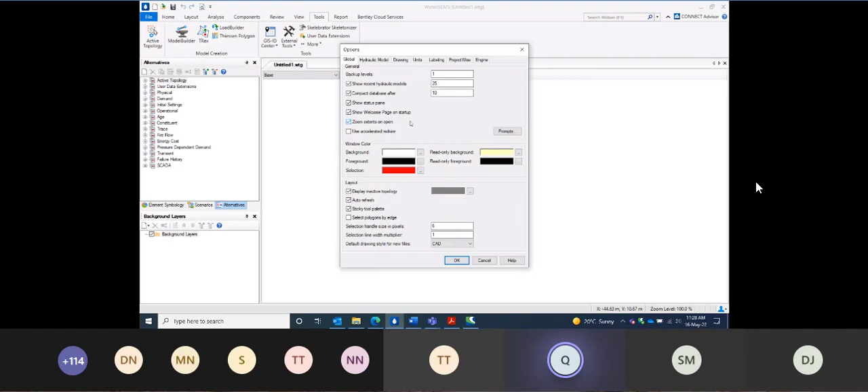Okay, continue Dean, yeah, units. Default unit system for new hydraulic model, SI. Reset defaults, SI. And that's it, okay.

That's okay, excellent. So back to home. And what we're going to do now is import some files so we can build our model, then we're going to modify the model, run it, check the results, and rerun it with some changes.

Home, and then all the way out here, Model Builder. In Model Builder, go ahead and select New.

Okay, so select database type: Esri shapefiles.

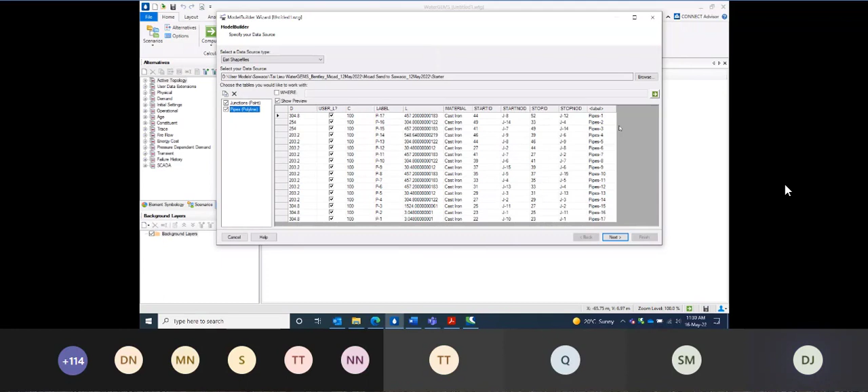Okay, next. Make sure you change the coordinate system to meters. And next. Oh sorry, just go back.

And just make sure this one is checked: create nodes if none found at endpoint. Yeah, and next.

This screen we don't need to worry about because this is regarding model building for a second time. So next. Yeah, this is all correct, current scenario and label is correct. So next.

Okay, so now we need to do table type: junction is correct, and then key field we want label.

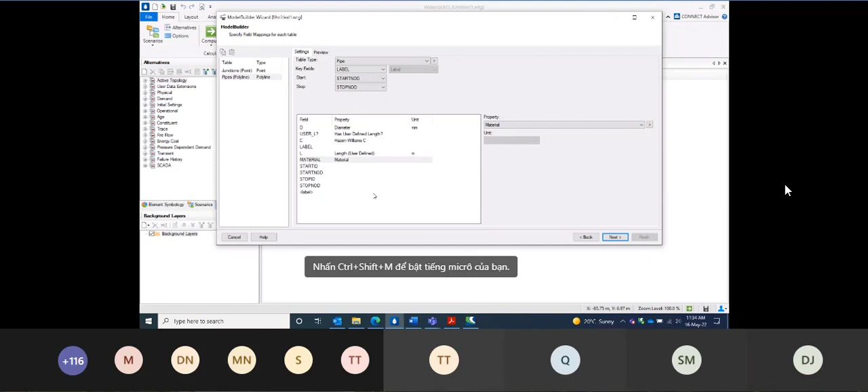That's all done? Yeah, yeah, please wait a minute.

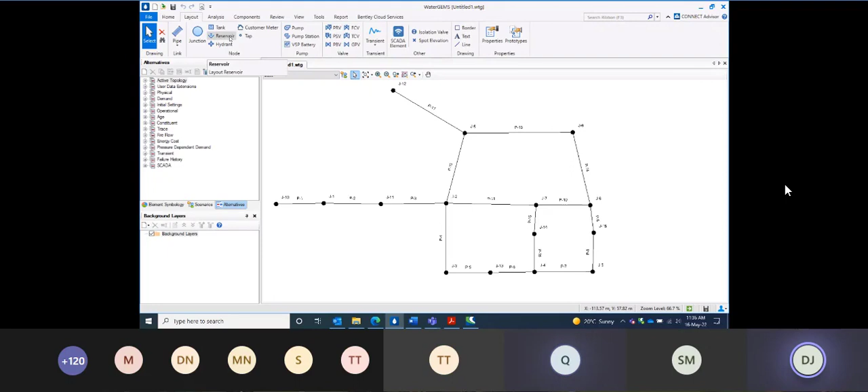So up to Layout and then select Reservoir. And then junction 10 out on the left, click right on top of it. It says, would you like to morph junction 10 into reservoir? Yes.

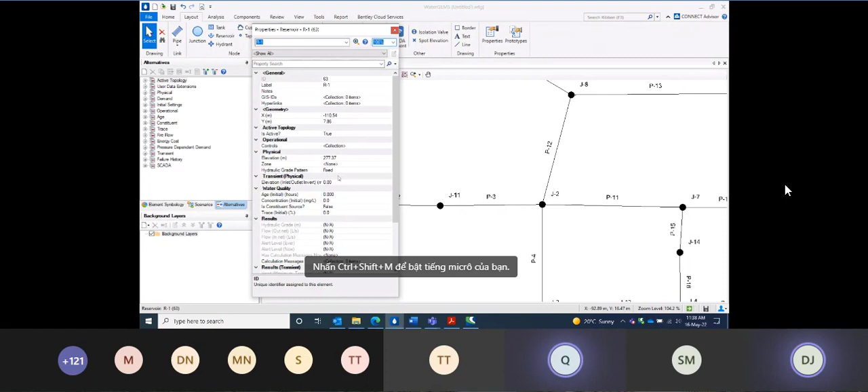Yeah, Dean, we can continue. So either right click and done, or select the select toolbar, and then you can double click to open up the properties of the reservoir. And we need to change the elevation. So the elevation here needs to be changed to 289.56.

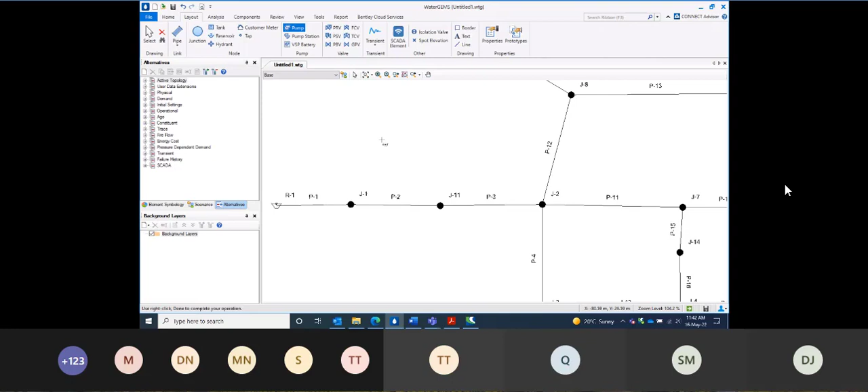Now we need to morph the other elements. So the next one, on the Layout tab again, and pump. Pump is junction 11. So click on top of junction 11. Would you like to morph junction 11 into a pump? Yes.

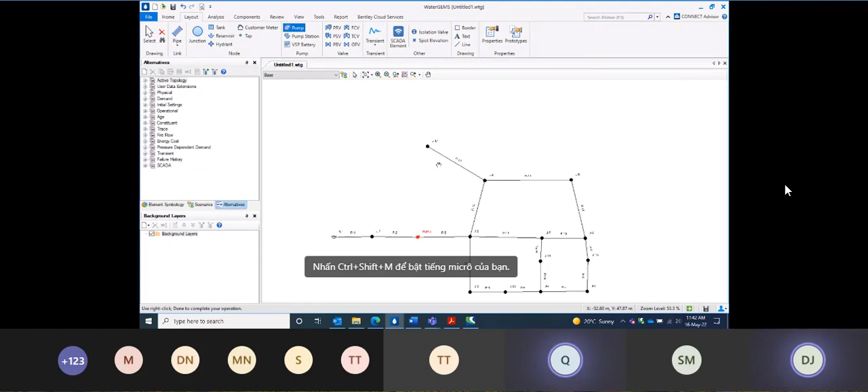Okay, so if we zoom out and go back up, this time tank. The tank is junction 12. So go ahead and click on junction 12. Would you like to morph? Yes.

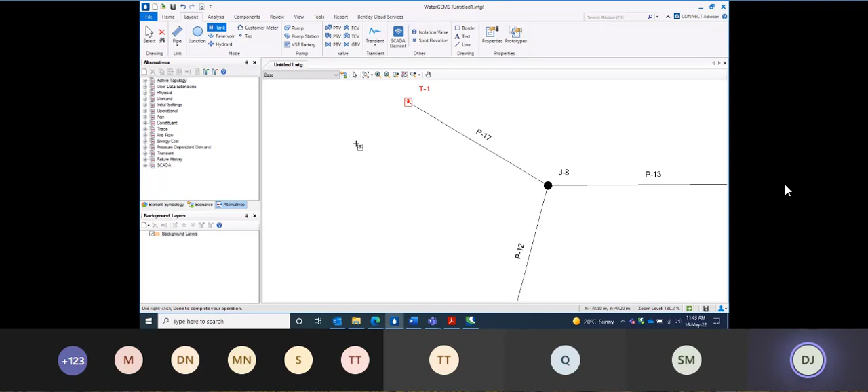Okay, so go back to the select toolbar. And then we need to use the control key, so hold down control and select 13, 14, 15. And then go to Tools, More, Batch Morph. So open up batch morph and selection, and the element type that we want to morph to is PRV. And then OK.

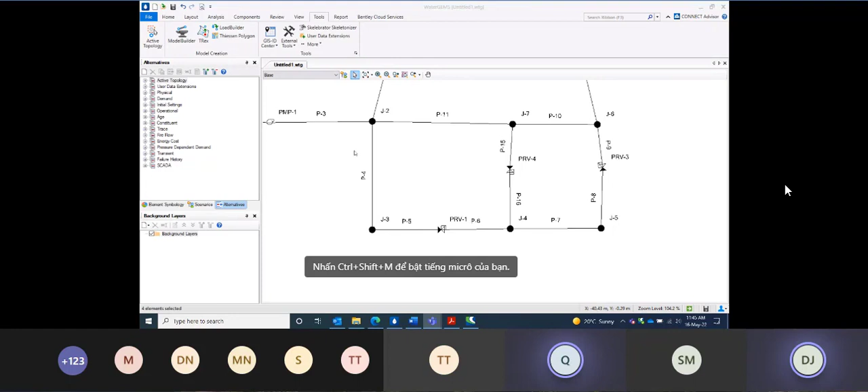So now we need to make sure that the PRVs are facing the correct way. So you come over to PRV 3 on the right and open up the properties. See the downstream pipe here is pipe 9, which is facing the wrong way. So what we need to do is reverse it. Go ahead and click reverse, and it will of course turn it around so that it's now facing pipe 8.

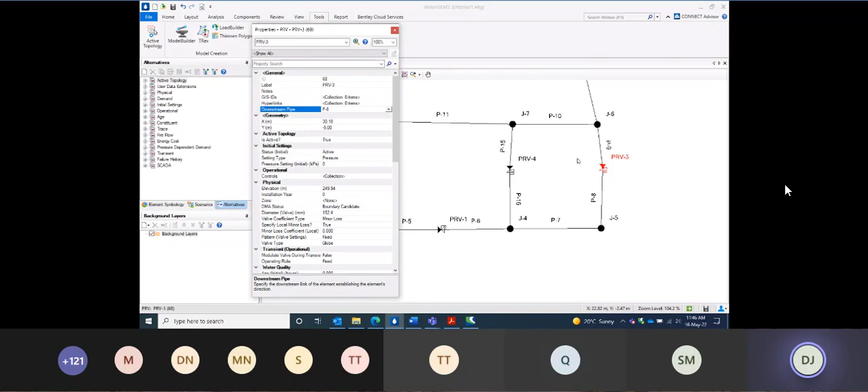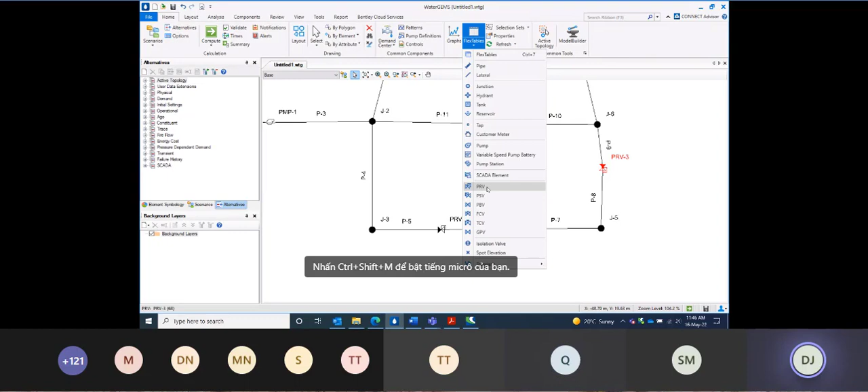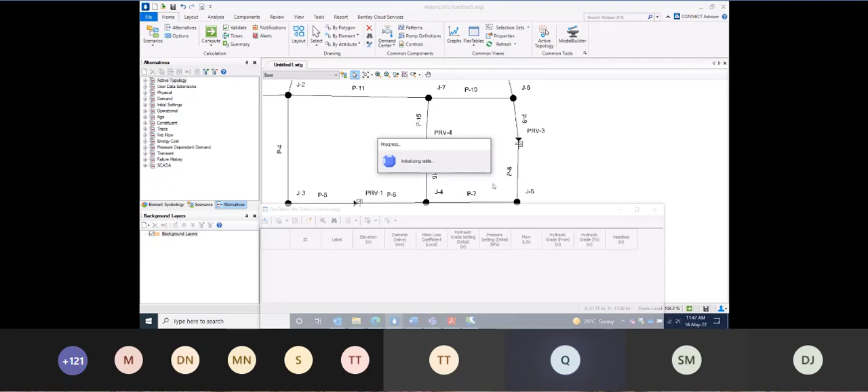Okay, so now we need to use the flex table to put in some values for the PRV. So if you close down the properties and then go back to the Home tab, and then Flex Tables, PRV. Hang on a sec, just change mine back to a tank here.

So now we need to put in the hydraulic grade setting, and also the diameter of the valve. So the diameter of the valve for all of them is 100. And then the hydraulic grade setting as well.

We need to check the elevations. So, 249.9, 253, 253.

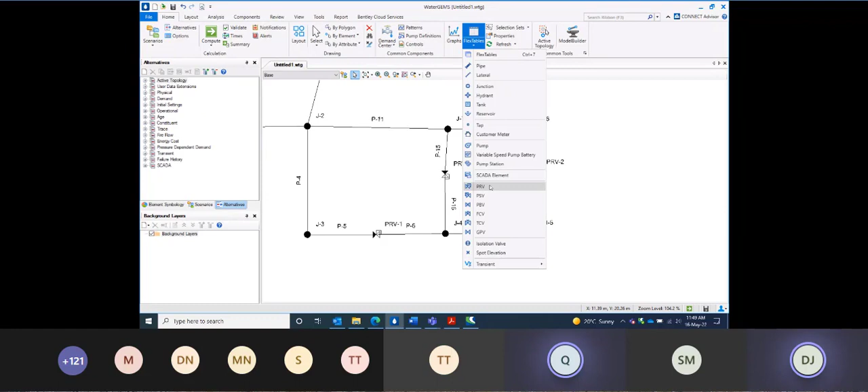Sorry, mine are the wrong way around. I'll just... no, yeah, it's fine. Okay, so now we need to go and put in a pump definition.

So next to Demand Center, we find pump definitions. Yeah. And then create a new one. And then we need to enter some values.

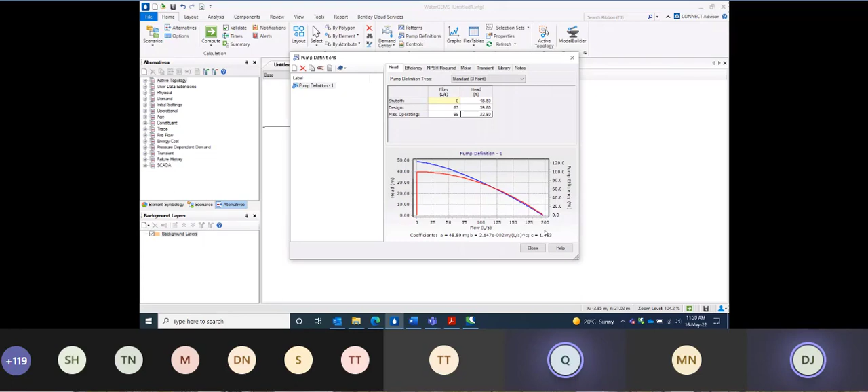Yeah. Okay. So if that's done, you can click close. And then go to the pump. Open the properties. Yes. And set the pump definition to pump definition 1.

Yeah. We also... but once that's done, that's all. You can close down.

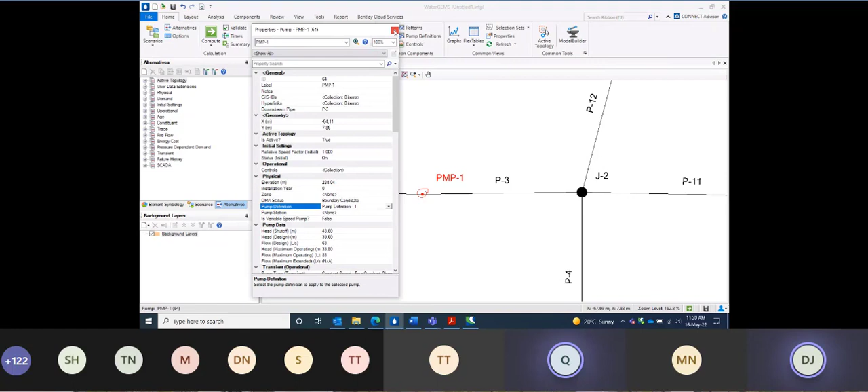And then go to the tank. Yes. So at the tank, we need to enter the elevations. So you need to copy down these.

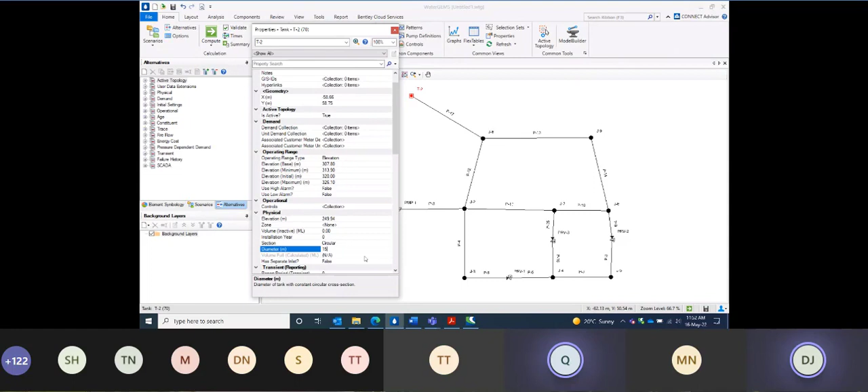Yes. Okay, yeah, okay, yeah. Once you've entered all of those, you can close that down and then click compute.

Yes. So now we can look at some results. So the first thing that we need to notice is whether or not the tank is filling or emptying. Yeah. And then we also need to notice down here whether PRV3 and PRV1 are actually operating.

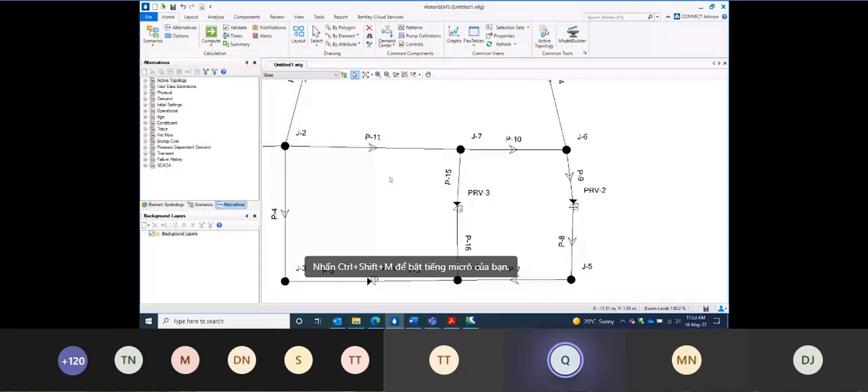Yes. Yeah. Okay, so we're ready to move on to the next portion, are we? Of this workshop?

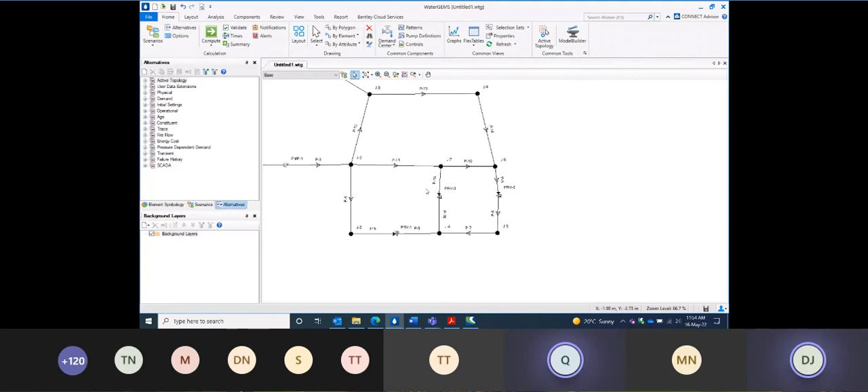Yeah. Okay. Yes, please. Okay, so now what we're going to do is add an additional demand to see what happens to the system. As you can see, the flow is going into the tank from the arrow, which means the tank is filling. So what we want to do is put an extra demand on and then see if our tank is still filling or if it's emptying.

Yeah. So on the alternatives tab here, which is already docked on the left, you want to go to demand, and then expand demand from base demand. Yeah. And then right click new child. Yeah. So the child, I'm going to say average plus industry.

Yeah. And then double click average plus industry. Yeah. And then go and find junction 5 and highlight junction 5. Yeah. Change the demand base from 3.2 to 95. Yeah. Close that down.

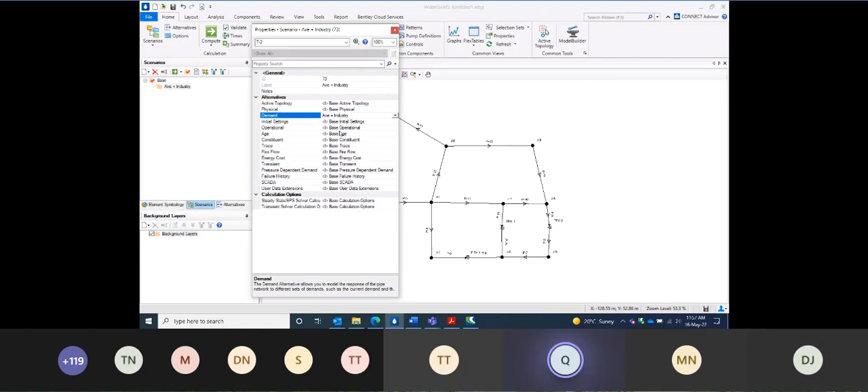Yeah. Okay, so double click on average plus industry. And then change the demand from base demand to average plus industry. Yeah. Close that and then right click make current. And compute. Yeah.

And should find that the tank is now emptying.

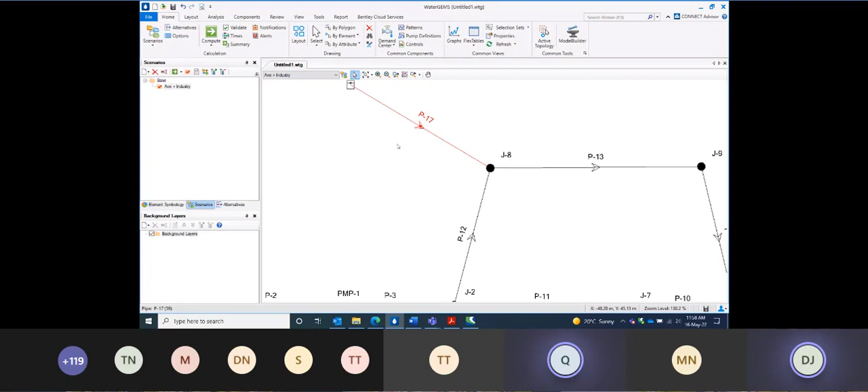And so that's it. That's the finish of the first workshop. Yeah.

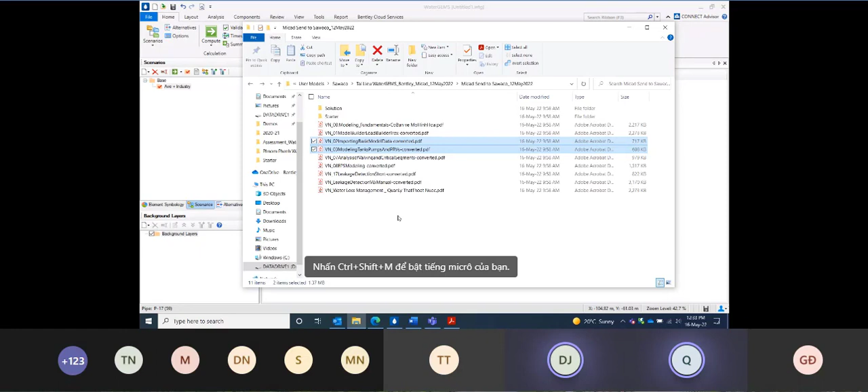And then the next one here, our fundamentals, we're actually going to draw that out ourselves. So rather than import it through Model Builder, which is easier, we're going to draw it on our own. It's okay, yeah.

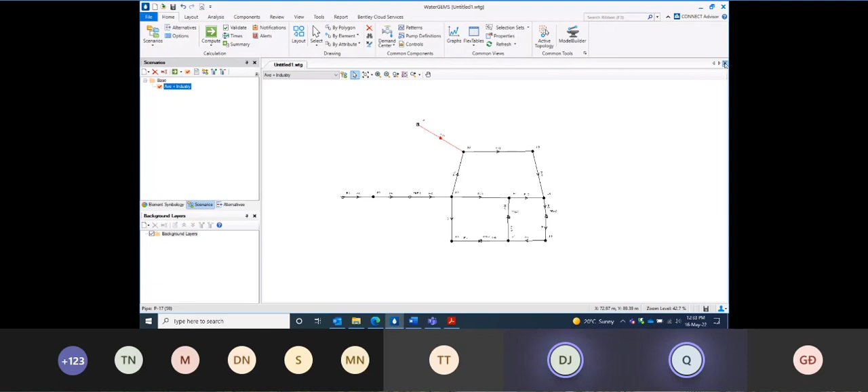Okay, so if you go back to WaterGEMS here, all of the solution files are available, so you don't need to keep this. What you can do is just close it down. And do you want to save it? Either yes or no, but for me, no. And then create a new blank hydraulic model.

It's okay. So if you go to the PDF, because this is our second one as far as the workshops, we can skip some steps, so we don't need to... just give me a second here. Yeah.

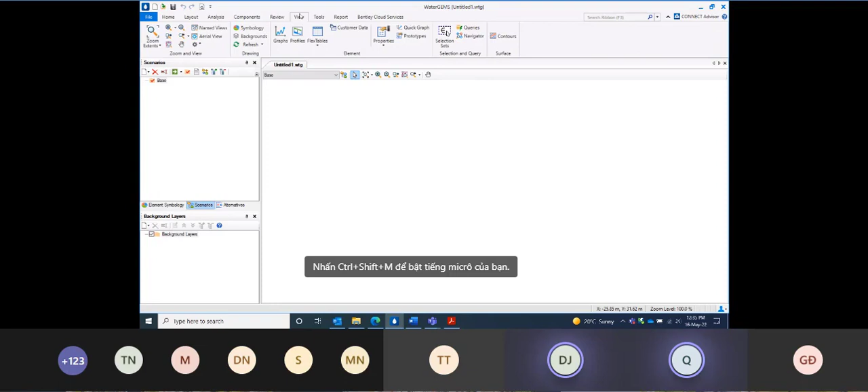So to do that, go to View, Prototypes. And then with pipe highlighted here, click New. Double click pipe prototype 1. And change the diameter to 150.

And the material here, if you click into material, see ductile iron, then you'll see the ellipsis on the right hand side. Click the ellipsis, and that will take you to the engineering library. Now, the library comes with the product, but you can also add your own library if you want to, so if you have a preferred supplier, say Vinidex or Steel Pipes or someone like that, then you can add the library into the engineering libraries. Otherwise, we have a built-in library which you can access using the plus, and there you can see the material library.

The one that we want is PVC. Once you've selected PVC, click select, and you'll see that it changed the material and the Hazen-Williams C factor. So it changed both of those properties at the same time. Once you've selected those as your prototype, you can close it down.

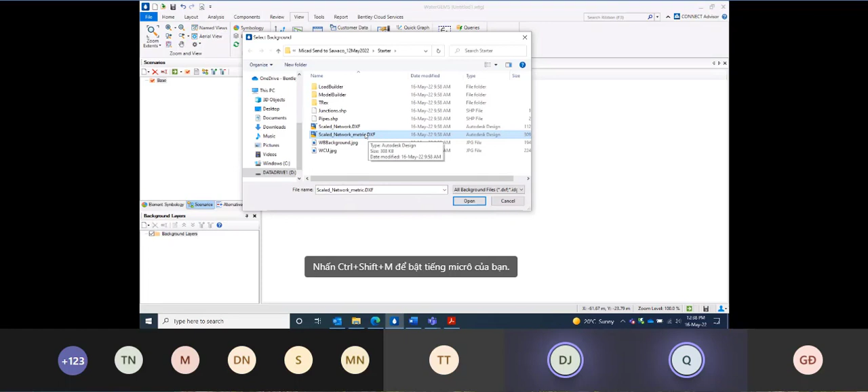Alright, once you've done that, we need to add a background because, as I mentioned, we're going to draw this by hand, so of course we need a background to draw onto. Down to the bottom left here, in background layers, and new file. The one that we want is in the starter folder and scaled network metric. Click OK, and then you should find a background.

Yeah, it's okay. Alright, so now we need to lay out the network. Before we do that, I'm going to give you a chance to practice. So if you come up firstly to the tools tab, more options.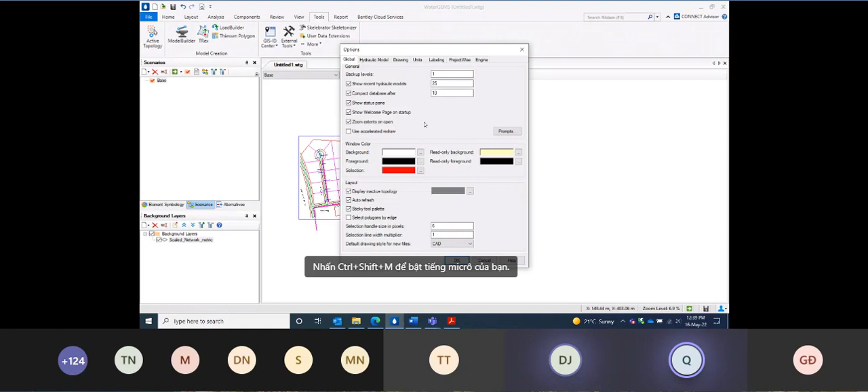Okay, so if you go to the drawing tab, you need to change the symbol size multiplier to 5, the text height multiplier to 10 - that's just because of the scale of the background we're using. So we'll change these multipliers, do some practicing, then delete those and draw it out properly. Symbol size multiplier 5, text height multiplier 10, then OK.

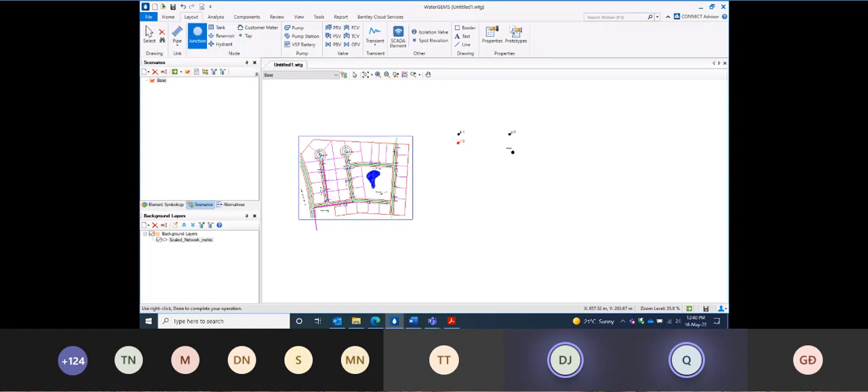Yeah, that's okay. Okay, so go up to the layout tab, and you see that we've got all of the elements listed here. If you select any of the elements to the right of pipe, for example junction, you'll see what happens if I place junctions - there's no pipe, it's just placing an individual junction with no pipe. So to place a pipe, you always need to use the pipe tool here. If you click on that, you'll see it will do the same thing, placing junctions, but this time it has a pipe connecting from junction to junction.

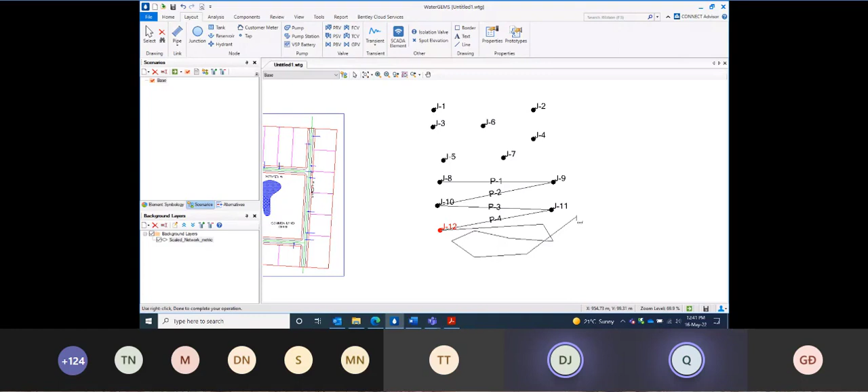So if you right click, you can change the type of element that you're placing, and then right click and you can place various things - so pump, and then change it back to junction, and right click and left click.

If you click done, it will disconnect from the element, and then you can rejoin things with the pipe tool. So you can connect them and then right click done, disconnect, connect in, reconnect, right click done. I'll give you a few minutes to practice the right click and left click buttons.

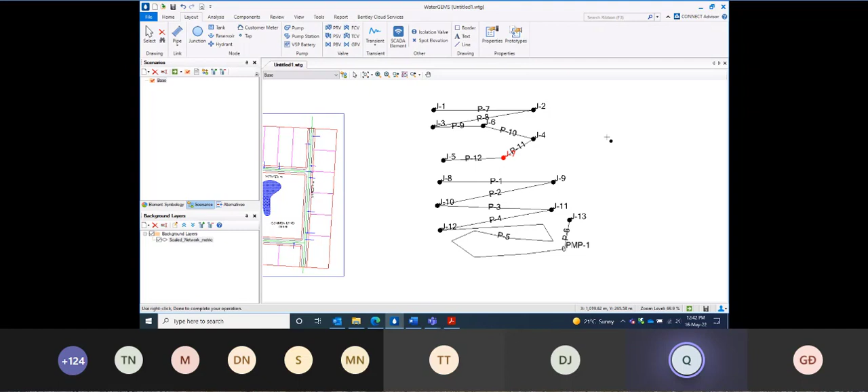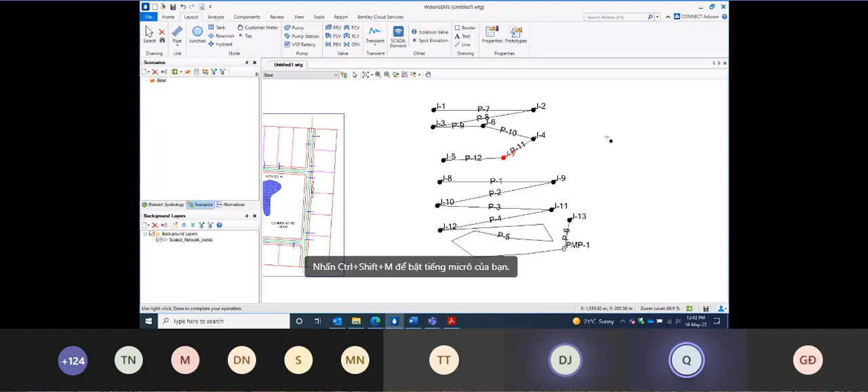Yeah, we can continue. Okay, so you go done, it goes back to select, and what I'm going to do is just draw a box around the whole thing and delete.

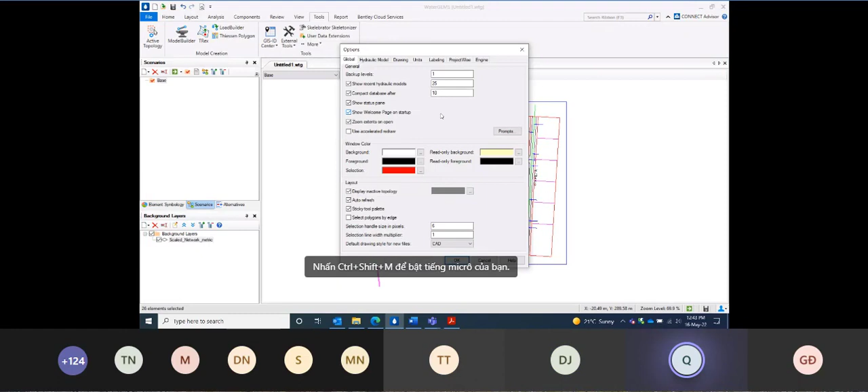If you were like me and you practiced, then we need to reset our drawing labeling system. So go to tools, more, options, labeling, and then reset. This part isn't in the PDF, it's just a bit extra because we had a practice. If you didn't practice, then you don't need to do that, but you just need to reset them so that they all go back to 1.

That's okay. Okay. So, okay, and then back to the layout tab and the pipe tool.

Now, what we want to do is come up to the top right here and right click anywhere, so right click, change to tank. And then up here in the top area, go ahead and place, using the left click, a tank. That's okay, yeah.

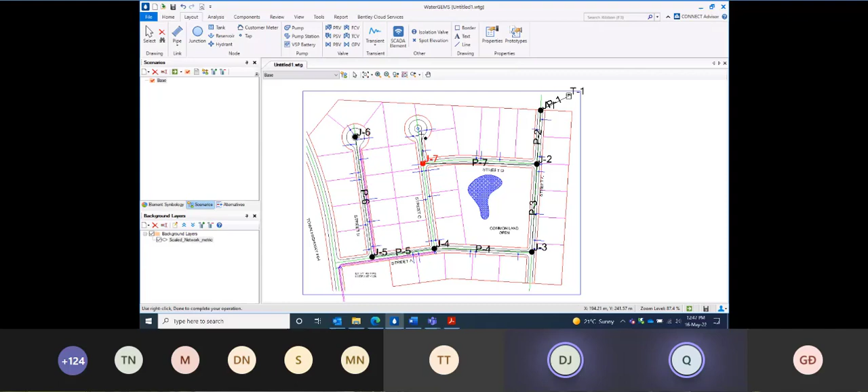Once you've placed junction 6, you need to right click, say done. Then we need to reconnect into junction 2. So connect to junction 2, over to the end of the road, that's junction 7, and then up to junction 8. Once you've placed junction 8, right click, done.

Now we need to connect junction 7 into junction 4. Click on top of 7 and then on top of 4, right click, done.

Require a few minutes for SAWACO to follow. Yeah, sure, yeah, one minute. Yeah.

Yeah, then you can continue. Okay, so the last bit is just from junction 5 over to the end of that road for junction 9. That's it, so right click, done, and then go back to your select or done. Yeah, okay.

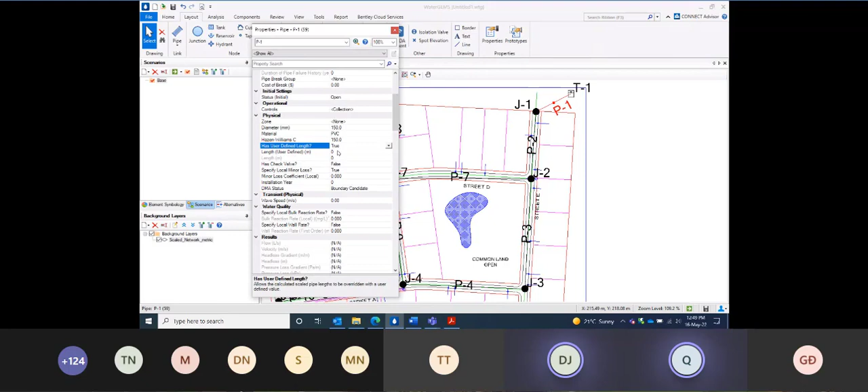What we want to do is scroll down into the physical section, where it says has user defined length is false. You want to make that true, so if you double click on it, it will swap to true, or you can use the drop down and select true. Either way, you need to enter in 137. Yeah, okay.

Alright, once you've done the pipe, you can either close down the properties and double click on the tank, or with the properties open, you can just click on the tank.

So now we need to enter the elevations of the tank: 198.1, 198.1, 202.7, 207.3.

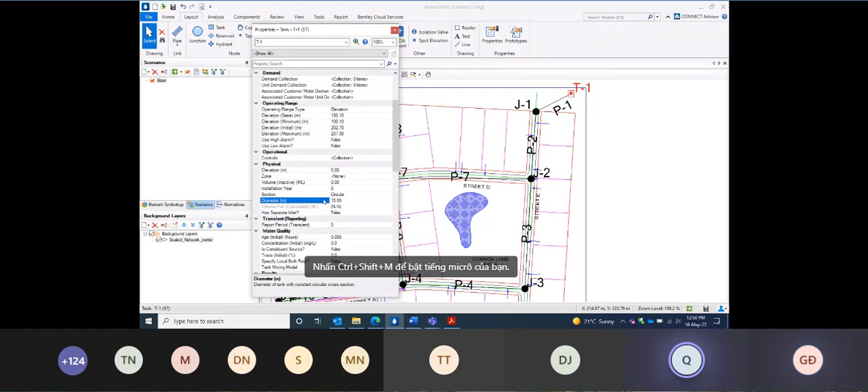Also, down further in the physical area, we need to enter the diameter, which is 15. Yeah, yes, okay. Okay, so if you close that down, and then go back to the Home tab.

Under the Flex tables, you'll find the Junction table, and the junctions should be listed from 1 to 9 in order. What you need to do is enter the elevations and just copy them down.

Just give you a minute to copy those down. Yeah, one minute. Sure.

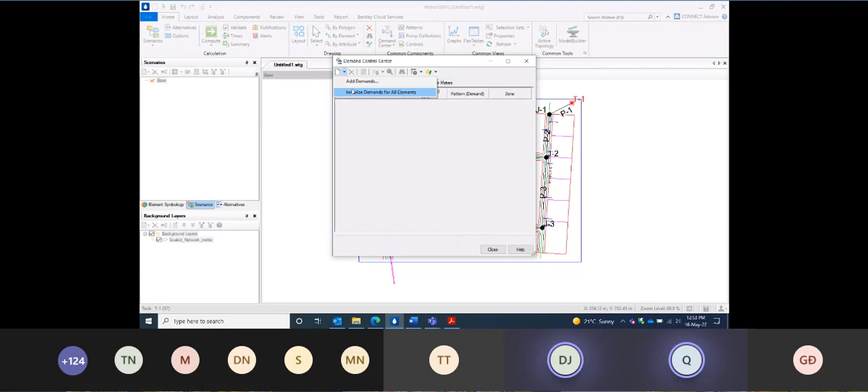So what we need to do is fill in the 9 junctions. However, they're all the same, so rather than typing them in, there's a quicker and better way, and that's the global edit. The global edit function is extremely valuable and will save a lot of time.

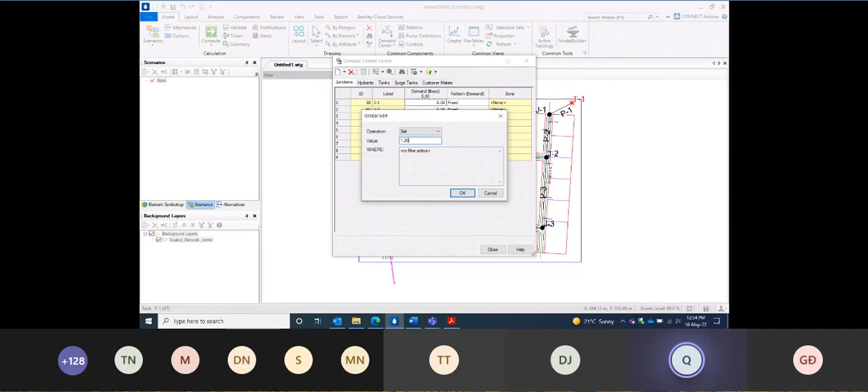So if you go up to the top demand base and right click, you'll find global edit. Set value 1.26. Okay, so they should all be 1.26 now. And close.

Once you've done that, you can go ahead and click compute.

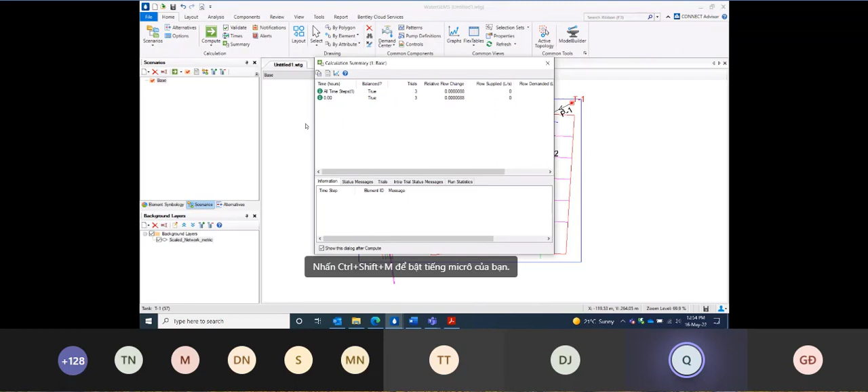Okay, so now that we've computed it, we have results available, and what we're looking for here is some particular results, and that's junction 6. So we're interested in junction 6 and the pipe leading into junction 6, which is pipe 6.

So the first thing I'm going to do is just click on junction 6 to bring up the properties, then scroll down, and here you can see the pressure. You see that the pressure is 25 meters head, so 25.21. So there is a lot of residual pressure here at junction 6.

And then I'm going to click on pipe 6 and do the same thing, scroll down to the results, and then you see the velocity here, 0.07.

Okay, so all we need to do is just remember those values. So 25 meters and 0.07 meters per second, and we can move on to the second part of this, which is when we put an extra demand on, and of course then we'll check the results and see what happens.

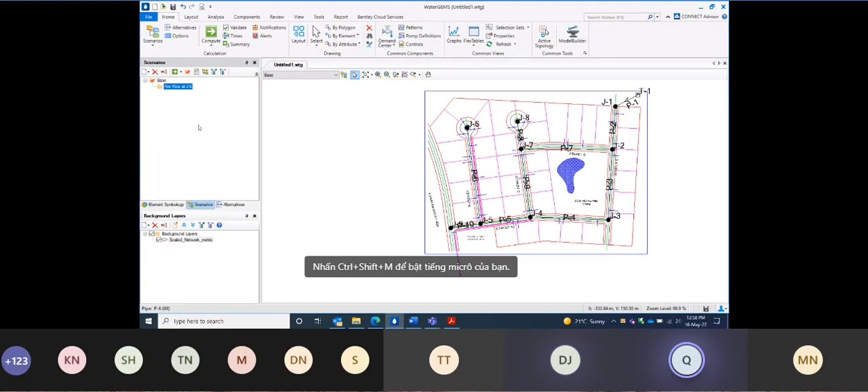Double click, open up the properties and change the demand from base demand to fire flow at J6. Now the most important thing is that you need to use the make current button here, or you can right click and say make current, or you can use the drop down here to make it current. Once you've done that, compute.

Yeah, okay, so you see that we've got an error message down the bottom. The error message says that basically our system can't meet the pressure, or the flow that we're trying to get out of it.

So I'm going to do the same thing as last time. I'm going to go to junction 6 and check the results. And you'll find that now, instead of 25 meters of pressure, we have minus 19 meters of pressure. So obviously, if it's minus 19, minus 18.6, that means we're not delivering the flow, or we're unable to deliver the flow.

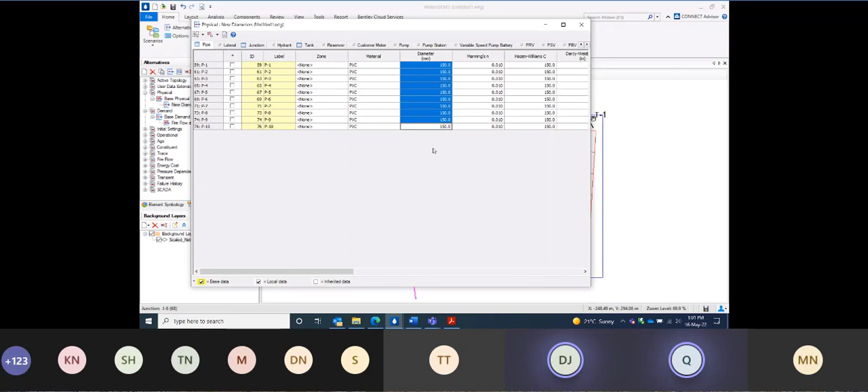So double click on new diameters. And you'll see here that the pipes are listed, and then we've got the diameter column here. What we're going to do is we're going to change some of these diameters.

So firstly, pipe 1, change from 150 to 250. Same with pipe 2. And then pipe 3 to 6 are all 200. And then the rest we can leave the same, 150.

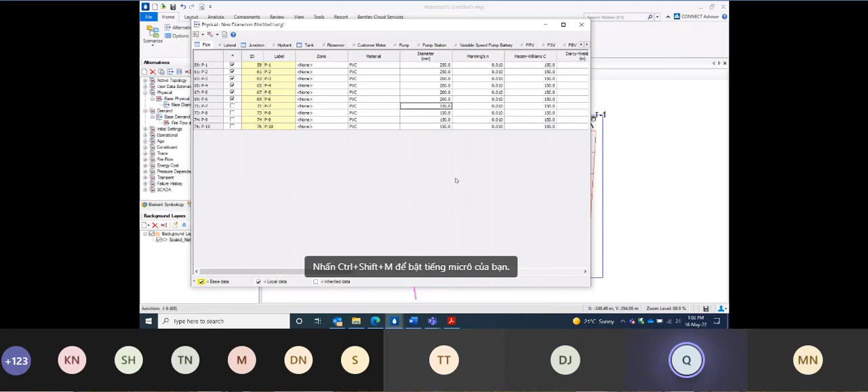Okay, close that down. And then we of course need another scenario to put that in. So back to these scenarios, and fire flow at J6, right click, new child. This is called fire flow with new diameters.

Open up the properties and you'll find that fire flow at J6 is already set for the demand, and that's because we inherited it from its parent. So because we took a child, we inherited that one. Of course we need to change the physical alternative though.

So go ahead and change physical to new diameters. Of course, don't forget to make it current, and then compute.

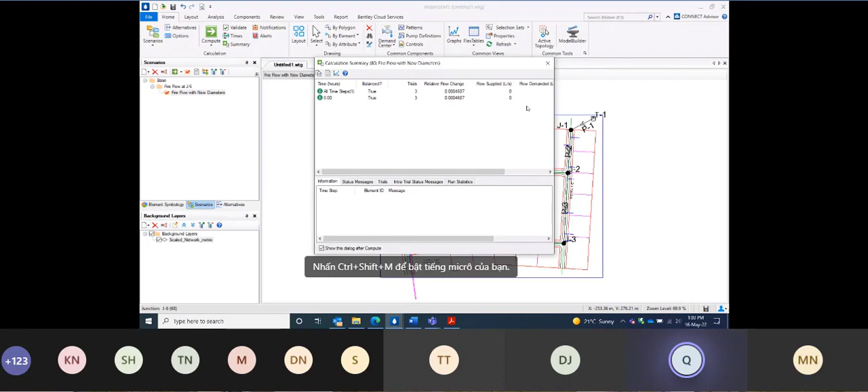Okay, so once you've computed it, you can go back to J6 and check the pressure. You'll see that now, even with a very large fire flow, with the increased diameters, we're able to get 16 meters of pressure, whilst also meeting the demand, which is of course the 63 liters a second.

You can check the velocity too if you want. Yeah, the velocity is over 2 meters per second.

Okay, any questions regarding that workshop? Because that's the end of it.

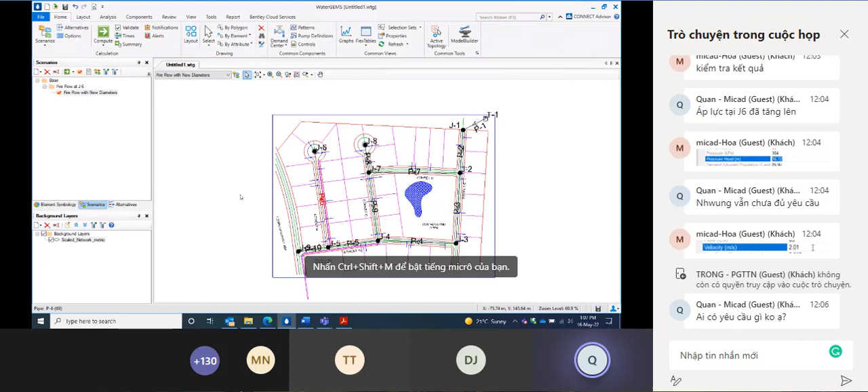For now, have no question. Yeah, we can continue. Okay.

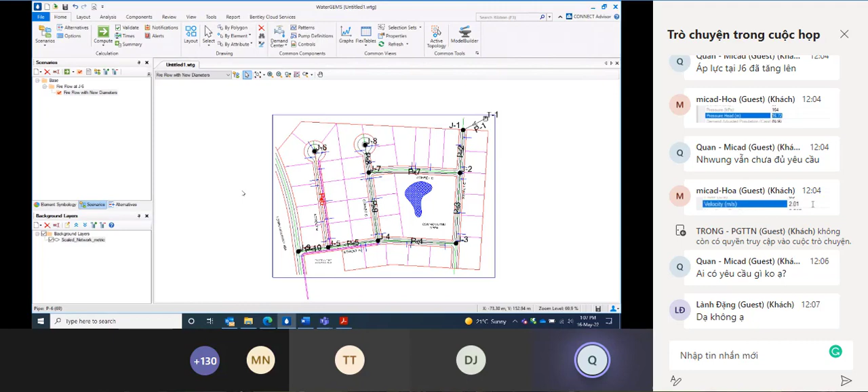So obviously that's another workshop finished for today. So not that one. We've now done 3 workshops, and for some reason there seems to be 2 of the same listed here, and this one's a PowerPoint presentation, not a workshop. So I think probably for today we should do one more and then finish, and then complete the rest tomorrow.

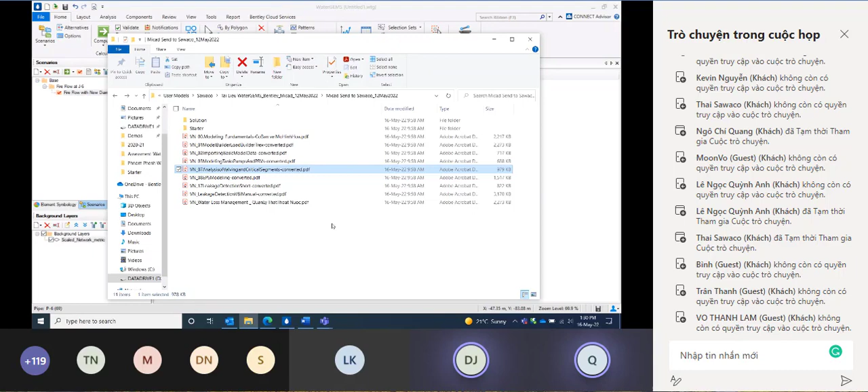So analysis of valving and critical segments, like I said, is the next one, and basically what we're going to do here is investigate a network with isolation valves in it to see whether or not the isolation valves have been placed in the correct spot, or if we need more, or if we need more interconnecting pipes.

So to open that up and get it started, if you close down the last one, and then this time go File, Open, and in the Starter folder you'll find Criticality. So go ahead and open up Criticality.

Okay, so first thing is you can see we've got the original valves here, so if you just zoom in and around, you'll find these isolation valves here, placed at various spots around the network. If you check the layout tab, you'll see there's a valve section here, and the valves here, you can see PRV and so on, flow control, throttle control, general purpose. So each of these valves breaks the pipe.

However, the isolation valve is over here on its own, and that's because if you check the isolation valve, you'll see that it has a reference pipe. But if you click on the pipe, you'll see that it's one entire pipe. So the isolation valve has not broken the pipe. Each one of these pipes is just one pipe with a valve on it, but it has not broken the pipe into 2. So that's the difference between this valve and all of these other 6 valves.

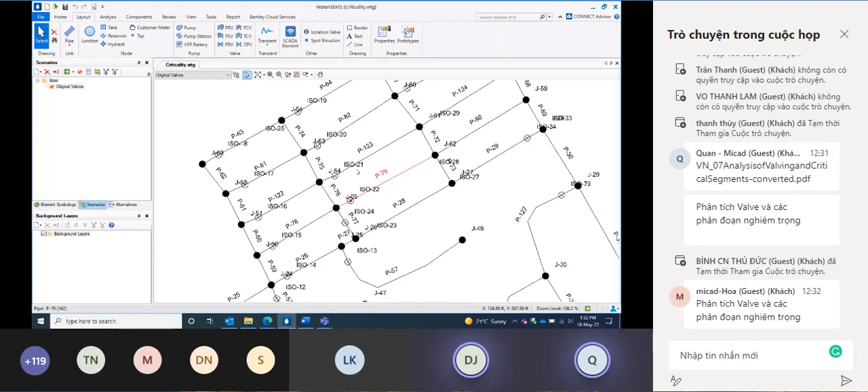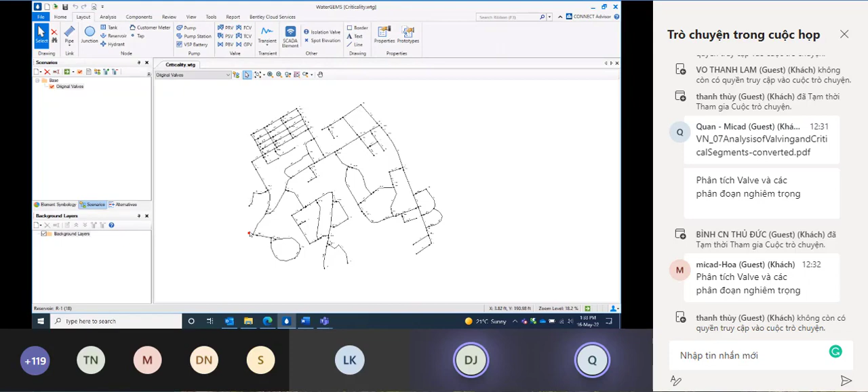So what we want to do is basically go and investigate the valves as they're placed now. Before we open it up and run it, the important thing to note about this particular system is that down the bottom left we have a reservoir. There's only one reservoir in this model, so there's no tank, no second reservoir - only one water source. That's very important, because if we close off the valve to the reservoir, the entire system will be out of water.

Okay, let's go and start criticality. So the analysis tab is where you want to go, and then on analysis, you find criticality.

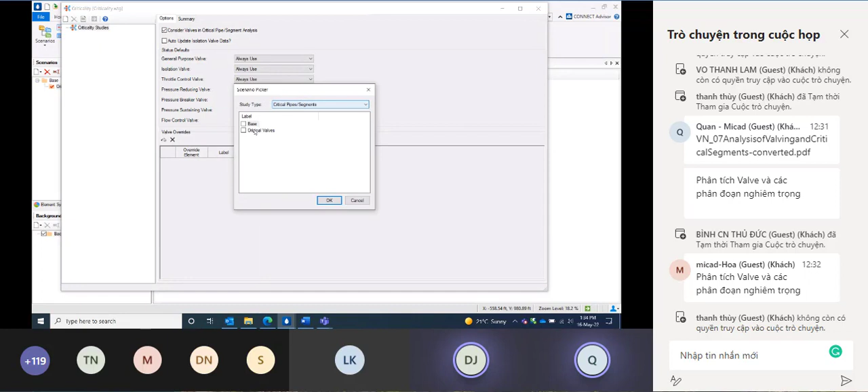Okay, so once you're in criticality, click new. Critical pipe segments, we want original valves, so just tick on original valves and click OK. The scope type here is entire network. Once you've selected entire network, go ahead and click compute.

Okay, so the first thing you can see is that it's broken up into 51 segments. Now these 51 segments, if you want to know what they look like, just click on the coloured pie here, click highlight segments. Once you've clicked highlight segments, just click minimize and you'll see your color-coded network here.

So if you zoom into an area, you'll see, for example, this red area here - this is one individual segment broken by this valve. So a very clear example of one segment: one valve, one segment. Then you go to a more complicated one.

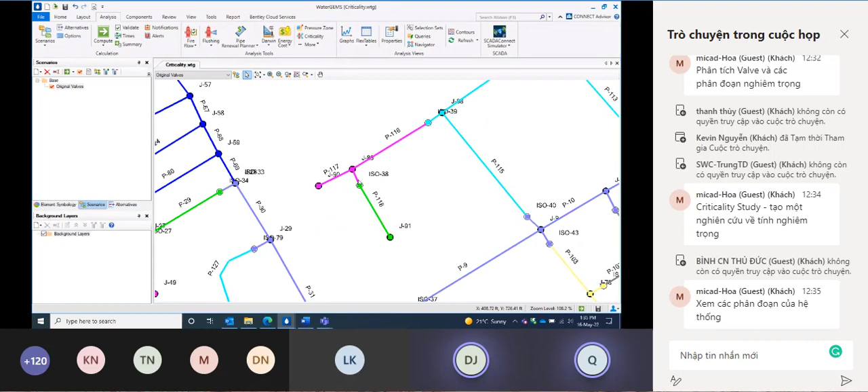Like for example, you can see this segment here has a valve here and a valve here, so you can shut off this portion or this portion or this portion. So you can see they get varying complexities as you go around and see where you can valve the system off. You can see this blue one here, you can close off this entire segment.

Alright, so back to criticality. And then over on the left, go to outage segments and click compute.

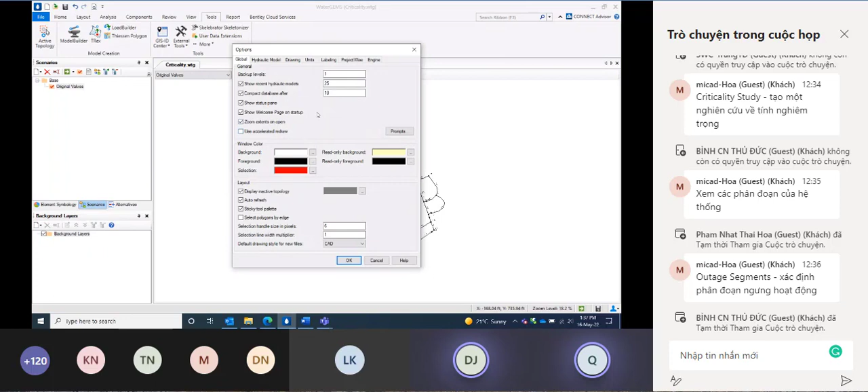Now the thing that we're interested in here is if you go over to the right - and for some reason this is in feet, so just close down criticality. Tools, more options. If you open up the options, go to the units tab, and you want to reset defaults here - reset defaults SI.

It doesn't change anything about the model or the project. It just means that someone's changed the units in this particular model. So click OK. Go back to analysis, back to criticality.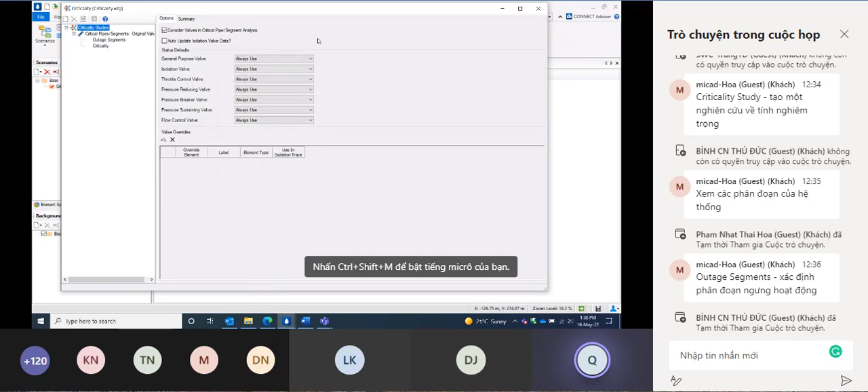Okay, this time over to outage segments and scroll across to outage set length and right click sort descending. So you can see here that segment 46 has an outage length of 11.8 kilometers. That's how much pipe would be out of water and needs to be drained if that particular outage segment was to be shut down.

So if you want to take a look at outage segment 46, scroll down in the middle, highlight segment 46 and then click the pie. And as I mentioned earlier, you see that the reservoir here has been valved off, which means that the entire network has run out of water.

However, if you go back to criticality and back up to all segments, see the second worst one here is nearly 5 kilometers - outage segment 41. So again, I'm going to go and find outage segment 41.

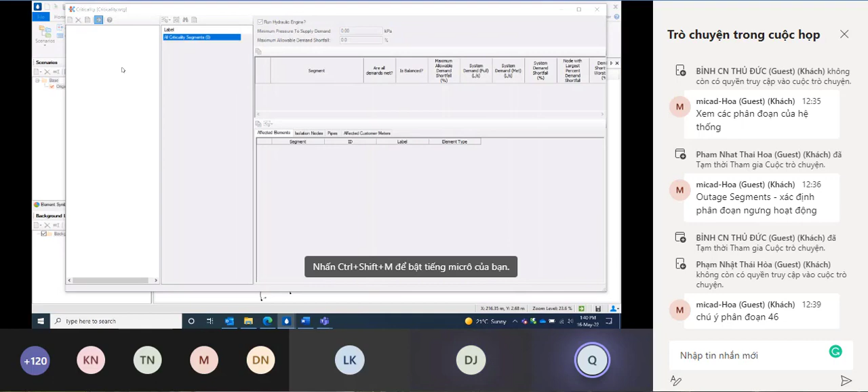Okay, so this time we want system demand shortfall percentage. So system demand shortfall percentage here, and I'm going to again right click sort descending. And you see the same two segments here. Segment 46 is of course 100% of the entire network, and then you got segment 41 here - 45% of the customers on this network are out of water.

Alright, so what we need to do is go and fix it. We need to put in a new pipe so that we can get this second worst segment here down from 45% to obviously lower than that. So close criticality.

And go to the alternatives, and from W valves in the active topology, right click new child alternative, which is going to be named new interconnect.

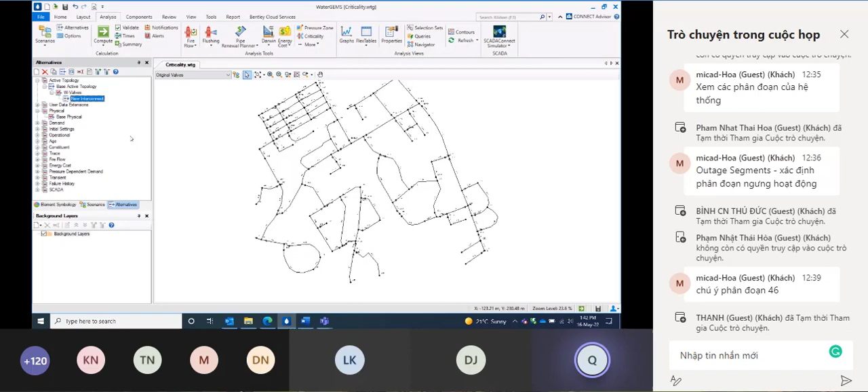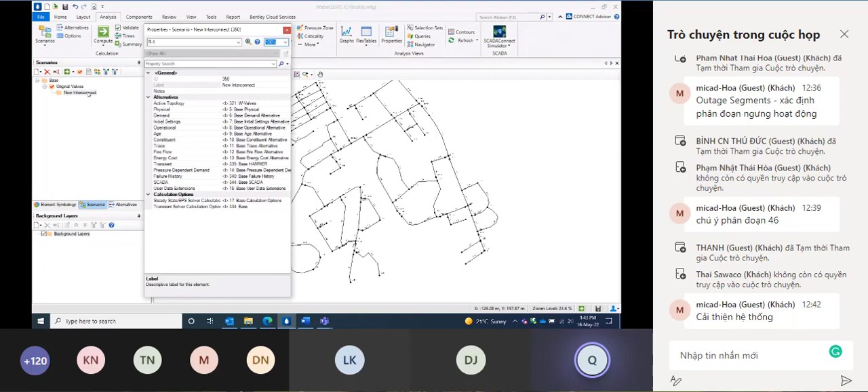Back to the scenarios. From original valves, we'll take a new child called new interconnect. Open up the properties of new interconnect, change the active topology, and make current.

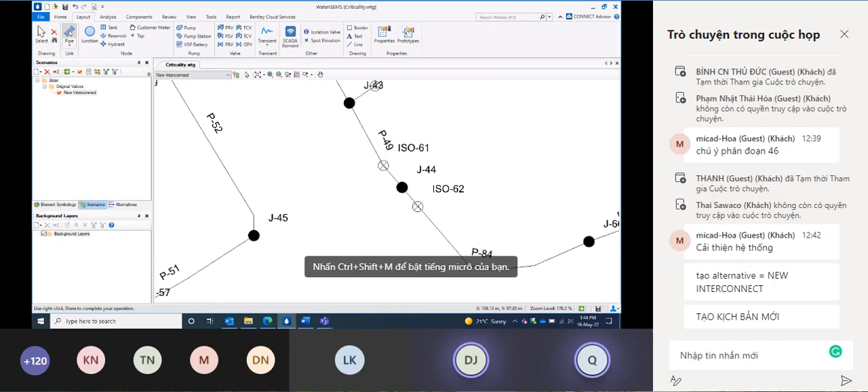Alright, so new interconnect here. Go over to the layout tab. What we're going to do is draw in a new pipe and then put some valves on it. The area we're interested in is down the bottom here, so if you zoom into that area, you'll find junction 45 and junction 44.

Using the pipe tool, just connect junction 45 to junction 44, and that's it, done. Now we need to place an isolation valve on it, so click on isolation valve and place one at either end. Make sure you click exactly on the pipe. Would you like to attach the pipe? Yes, and at the other end as well? Yes. And that's it, done.

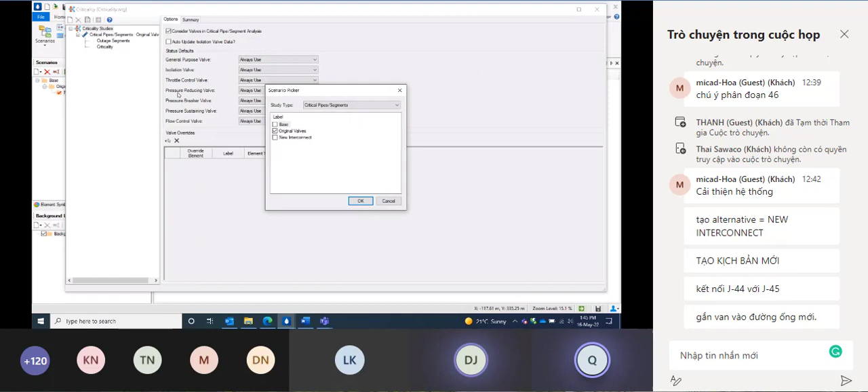Okay, so that's it, we can go back and test it. So back to analysis and criticality. Create a new one and tick on new interconnect. Click OK. Scope type entire network. Compute.

Alright, so you see that we've already got an extra segment there, and then outage segments, compute, and then outage set length, you want to sort descending. You can see here that outage segment 40 is much less than the 5 kilometers that we had previously.

It's now down to less than 1 kilometer. So you can also do criticality, run hydraulic engine, compute, and system demand shortfall percentage. You see it's now down to 25%.

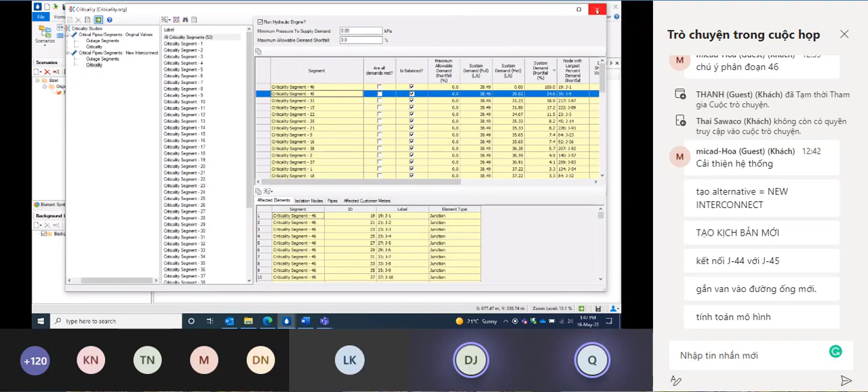Okay, so criticality is, as you can see, a very simple, quick feature to use. It's very, very easy to set up, and it's not in this workshop, but if you go to the tools menu and then more, you'll see this feature here: assign isolation valves to pipes. So if you use Model Builder to bring in isolation valves, you don't have to manually assign them. You can automatically do it using assign isolation valves to pipes. That's important because you may have several thousand pipes and or isolation valves that need to be assigned, so that tool can do them all automatically for you. It's a very important tool, and a very easy, simple tool to set up and run in criticality.

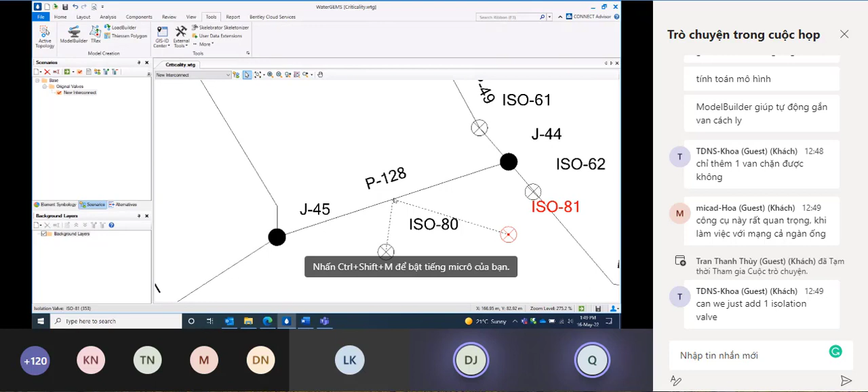Show how to add a single valve, you mean? Yeah, that's it. So instead of putting one on either end, you can just place one in the middle, right? Yeah, is that the question?

Yes, just one single one. Yeah, so you just want to grab one, and if I delete that, delete, so okay. Yes, and Mr. Khoa, is that okay? Yeah.

It's a good question because we added 2, one at each end. We didn't need to, because of course we can shut this pipe down either way. So there's really no need to put 2 on that pipe. It's a very good point. Yeah, that's good, thank Dean.